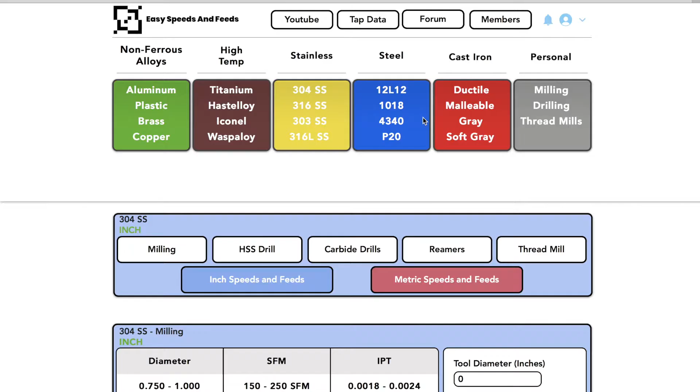This is the landing page, and as you can see up here, we've got non-ferrous, high temperature, stainless, steel, cast iron, and personal. All this is just kind of a guide to the material you're machining.

And if you click on one, it'll just give you some speeds and feeds. So let's click on titanium. So what we've got up here is milling, high-speed steel drill, carbide drills, reamers, and thread mill.

Let's say we want to mill some titanium. So we'll type in our end mill, it's a 1/4 inch. Surface footage 50 to 250, I'll use 150, nothing too crazy. Number of teeth, it is a 5 fluter.

Inch per tooth, we can go down here, we can see our range, so everything is set in a range. We'll go 0.001, so that's kind of a mid-range for that tool. And here's our speed, and there's our feed.

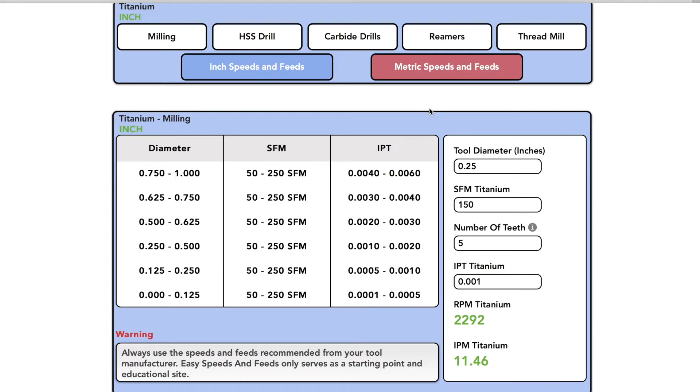Okay, so now you can go use a metric system. Go to metric, and let's go thread milling. You can also click it.

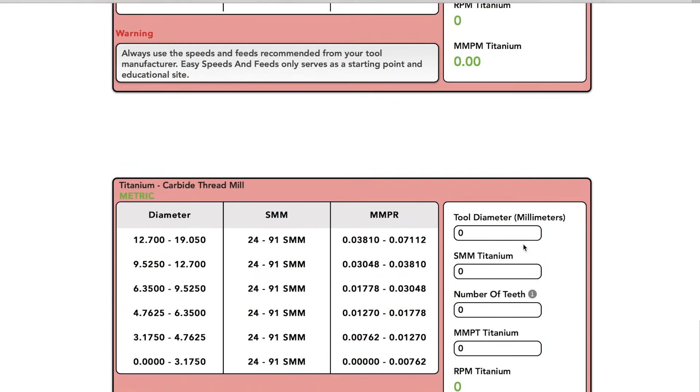See, I built this thing, but I use a metric system, so I get screwed up every once in a while. So I'll go 4.7625, 60 surface meters, number of teeth, it's the 3 fluter.

And millimeters per tooth will be in this range right here, so we will go 0.010, 120 millimeters per minute. So yeah, that looks right. So if you use a metric system, we got you covered.

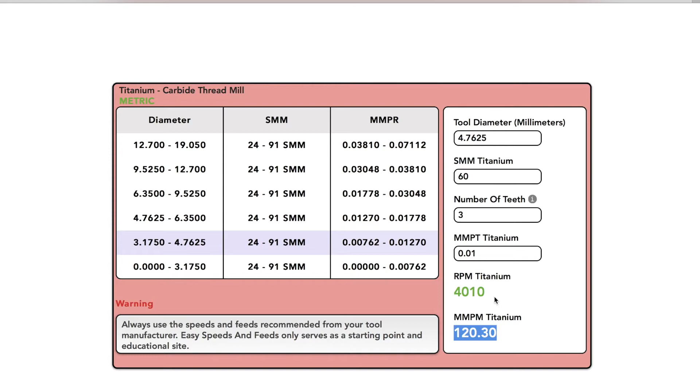Let's do aluminum. So this is kind of just an informal video where I'm just screwing around and showing you guys how things work. It's going to go on for a while, and we'll get to a lot cooler functions later on. Right now we're just going to explore the site.

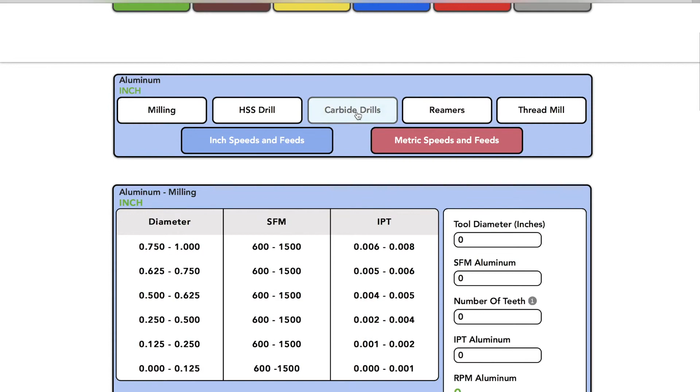So aluminum, go to drills, and go 0.201. Surface feet will go 300, inch per rev, find something in the range 0.005, actually we'll go 4. So if we're drilling some aluminum, here's our speeds and feeds.

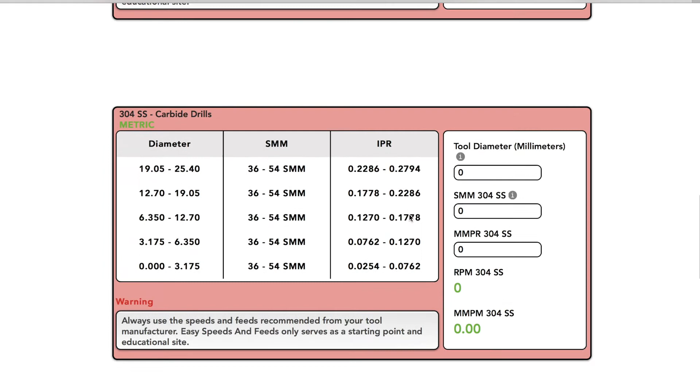Let's switch over to stainless, 304 stainless. We'll go metric, and we will go carbide drills. So diameter, go 12.7, so that's a 1/2 inch diameter drill I believe, 12.7. Surface meters, we'll go 40.

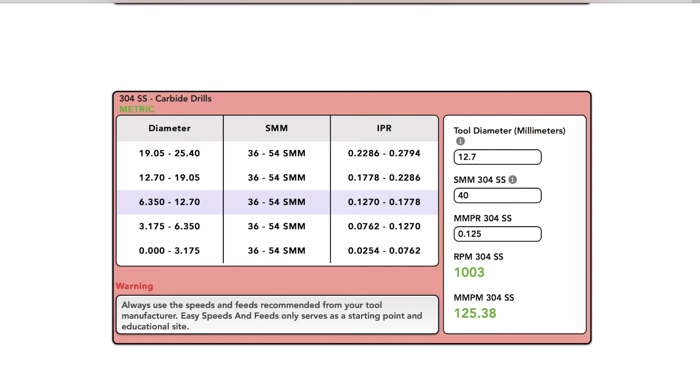Millimeters per rev is in this range, we'll go 0.125. Okay, so there it is. There are some carbide drills speeds and feeds for 304 stainless using the metric system.

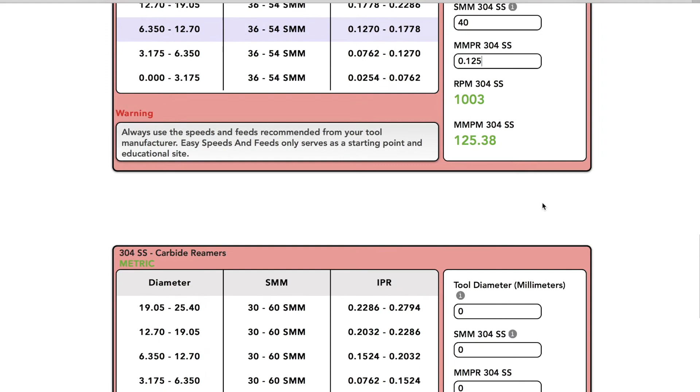Okay, so now that you guys are familiar with how the base calculator works, I will show you how the personal calculators work, this is pretty cool. So under this personal, we have milling, drilling, and thread mills. Milling is like inserted cutters, end mills, face mills, anything that's kind of a milling toolpath. Drilling is self-explanatory. Thread mills is when you're thread milling.

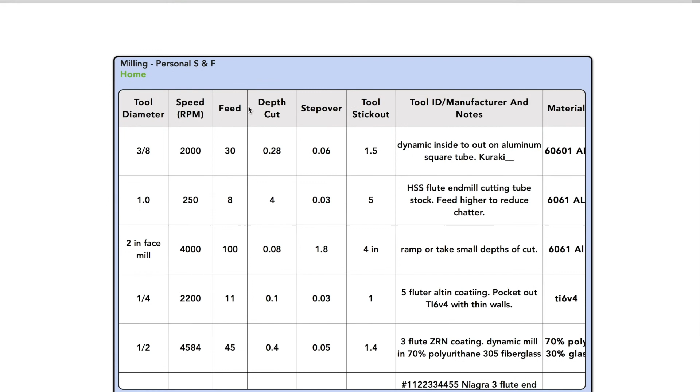So for milling, as you can see, I have all of this data in here. So let's just click on one. So it says half-inch end mill, speed 1,146, feed 20 inches a minute, depth of cut 200 thou, step over 50 thou, tool stick out 1.25 inches, and tool ID and manufacturer and notes.

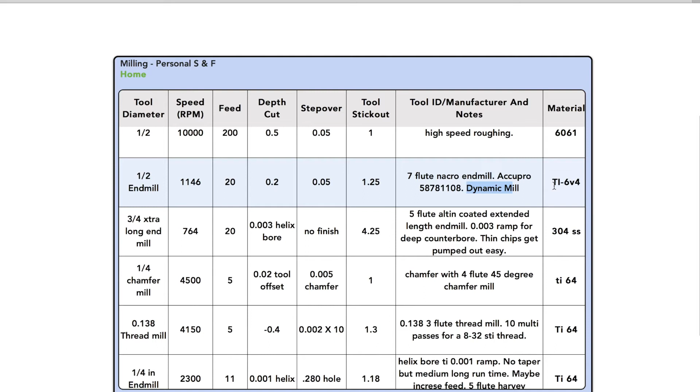It's a 7-flute Nacro end mill, so Nacro is the coating, and it's AccuPro 587-81108, and we're dynamic milling. Material, titanium 6-4, so Ti-6-4. So I have all this data in here, and all this data is from what I've proven out through my machining career.

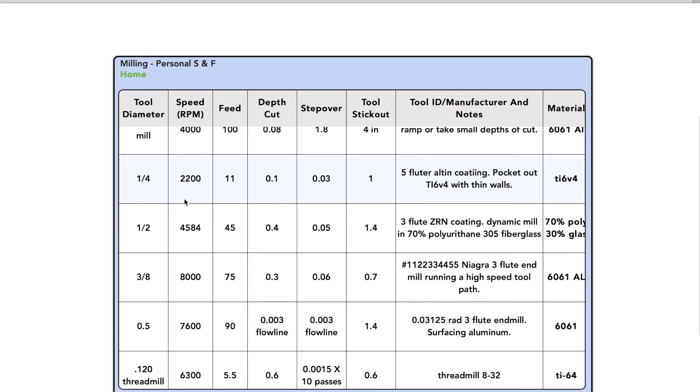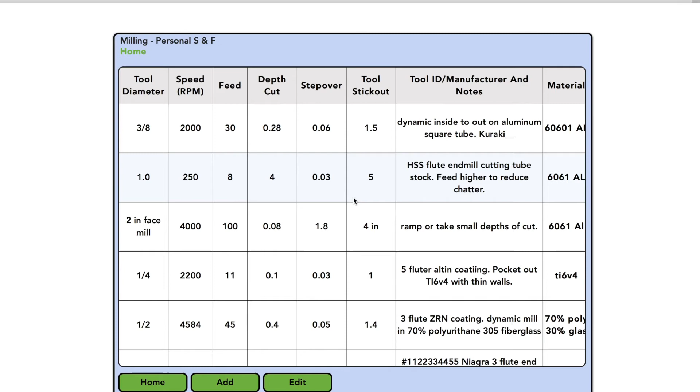Over the years, I've just put in stuff I thought would be useful. And once you create an account, which you can do up here, you'll gain access to put in unlimited speeds and feeds that you've proven out. So I'll show you how that works.

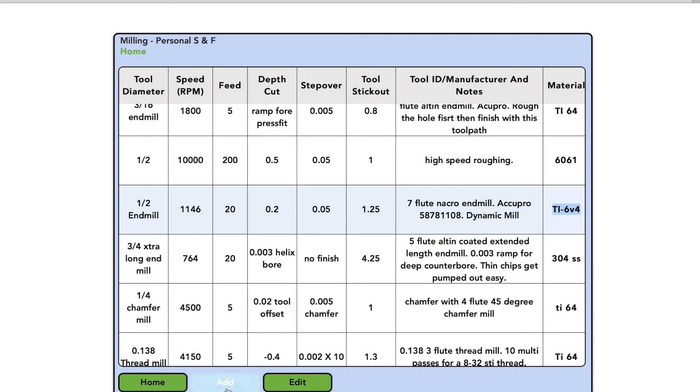We're at home right now where it just displays all the data. Go to add. And right now we're going to put in some data I used today. So we'll put in 3/8, .375, tab over. The speed was 2,000. The feed was 40, depth of cut 0.3.

I was running a bigger machine with limited RPM today. Step over was 60. Tool stick out, I believe, was 1.3. Tool ID, unknown at this time, but we can fill out as much as we can.

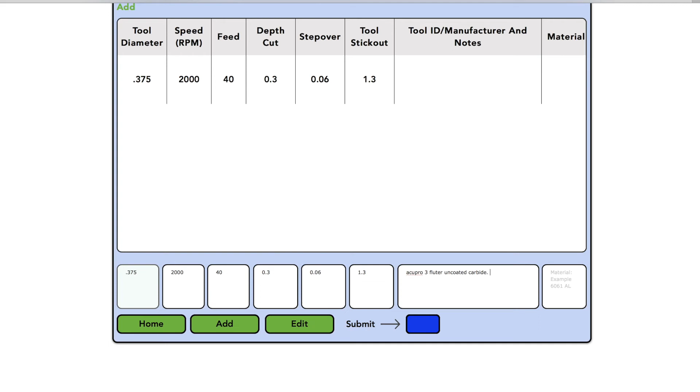AccuPro, 3-fluter, uncoated, carbide, and we can say it was running on the Kuraki I was running, so that's just a big 50 taper machine with a slower spindle, but really powerful.

So that's just a good note, and it was doing a dynamic pocket. Material, aluminum, we'll just call it 6061. Okay, so that's just some valuable info that we don't really want to lose, because throughout your career you would love to pull out this info out of your back pocket and reuse it.

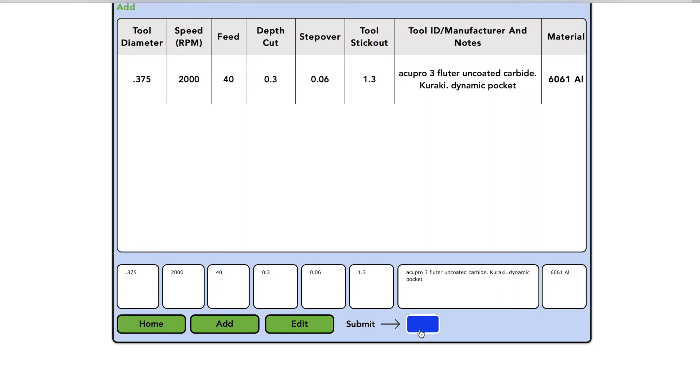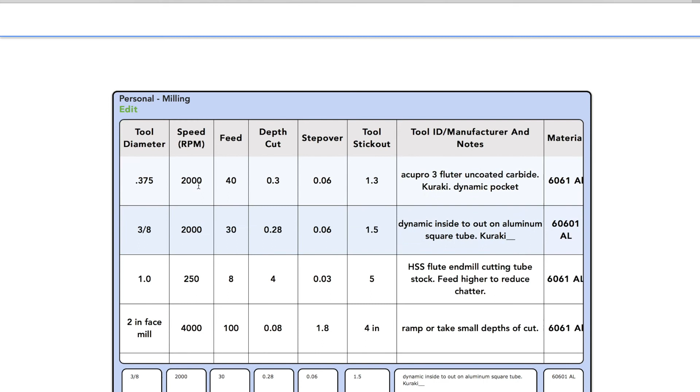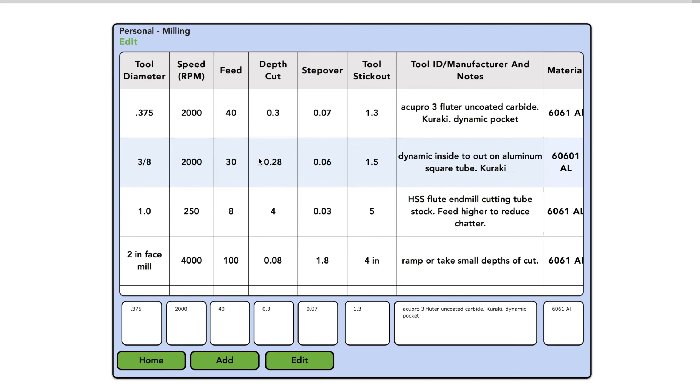So we'll just hit submit. Now we'll go over to edit, and here it is. Once you click on it, these boxes below autofill, and you can just change it to whatever you want. So it was actually a 70 thou step over. Now it's changed. Now you just click on home, and you got your data.

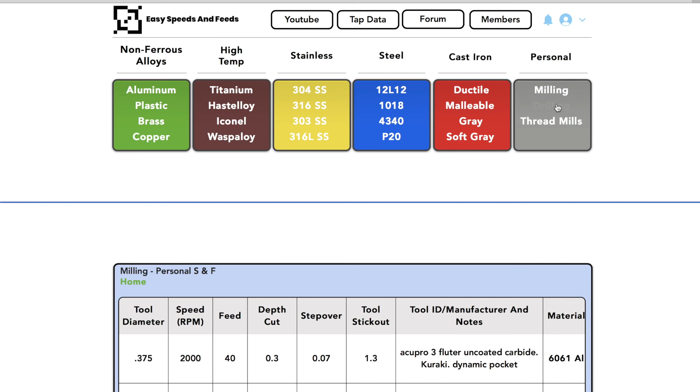So we'll click on drilling, and I have a bunch of through coolant drills I've been using, stuff in like stainless, tungsten, titanium, aluminum, and all these speeds and feeds are really good because it's a through coolant drill. You want to make it last. You want to be able to use it on everything.

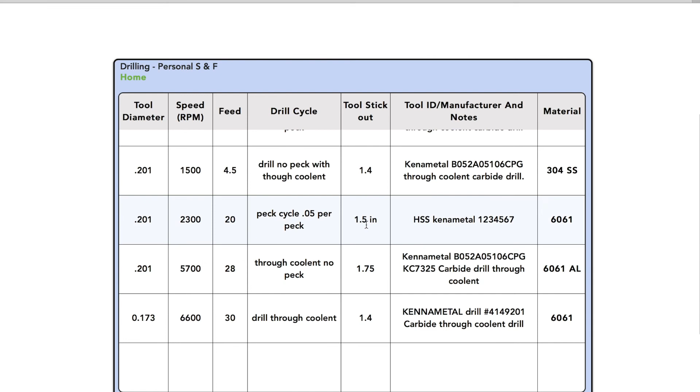So if you have your speeds and feeds proven out, you want to save it just so when you go back to run a job, you're not running it at the incorrect speed and feed, or you're not wasting time running it slow. So that's another bonus about using this.

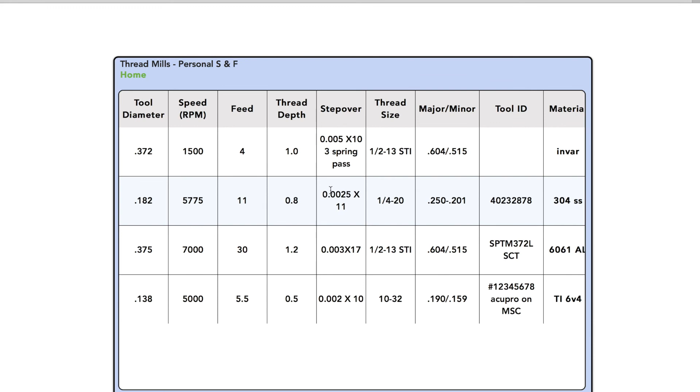So here's thread mills, these are all just my thread milling I've been putting in here. So you guys get the picture. And to finish it up, we got a YouTube. We have tapping data, which is just tap drill sizes for my minor diameter drills you need to use.

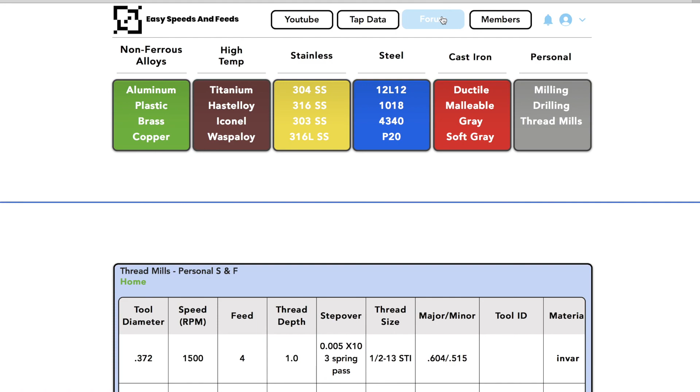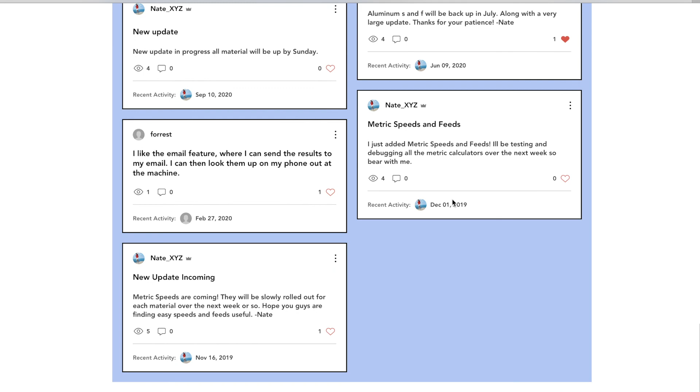Forum. Here you can just chat with your fellow machinists about stuff. It's just getting going, but there's a good amount of posts in there. And members. So on this member site, we currently have 320 unique members, all machinists, I hope. And you can upload a photo, give yourself a name, and just basically message each other and talk machining and manufacturing and whatever.

So the list goes on and on and on. And that's just the real basic overview of this website.